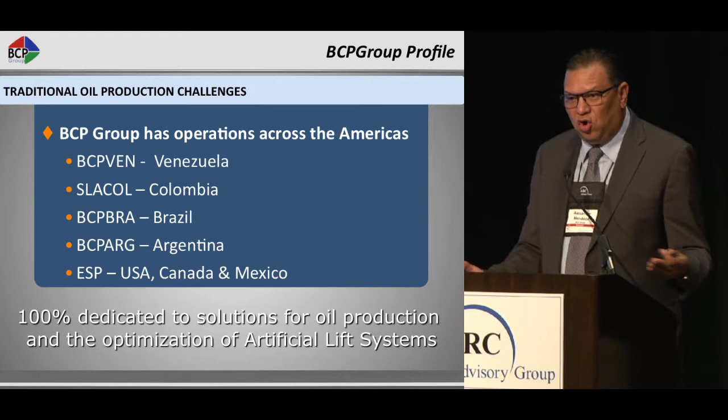But the challenge for the company today, for the end user company, is really to create more value and reduce the oil production cost with more efficiency. If you ask all the end users in the oil field, everybody needs to pay less money for the product, crude oil, and use less energy consumption.

But of course, all the oil production is not in the cities. If you identify the oil field globally, all the oil fields are outside the city. You need more people to go to the oil field, more dedicated people with experience, with technology, outside the biggest cities. In the Gulf of Mexico, in the Orinoco Belt, in the pre-salt in Brazil, all the oil fields in Africa, Saudi Arabia, are outside the big cities.

And the first challenge is oil production optimization. How we can increase the well run life in the downhole, how we can increase the surface equipment run life, and additionally how we can optimize this solution.

The other point that Sandy from ExxonMobil talked about is standardization, how we can create value in the future with the knowledge that we have now.

The massification for artificial lift technology is basically mandatory today. All the pressure in the downhole reservoir for the crude oil measured, in 90% of the oil fields, needs an artificial lift method: gas lift, rod pump, ESP, and PCP pump.

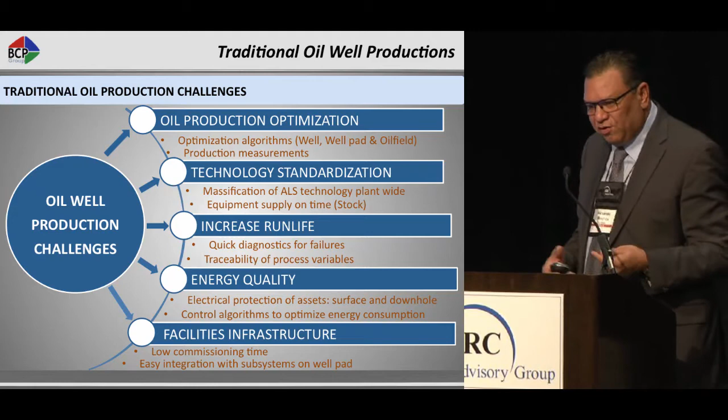For illustrative purpose, we show our challenge for every day in the oil field. For ESP completion and PCP completion, these two artificial lift methods are the leaders now in the global marketplace. Of course, there is the biggest base installed for rod pump, but in all the major new projects, these are the two methods we have as the sample for this presentation.

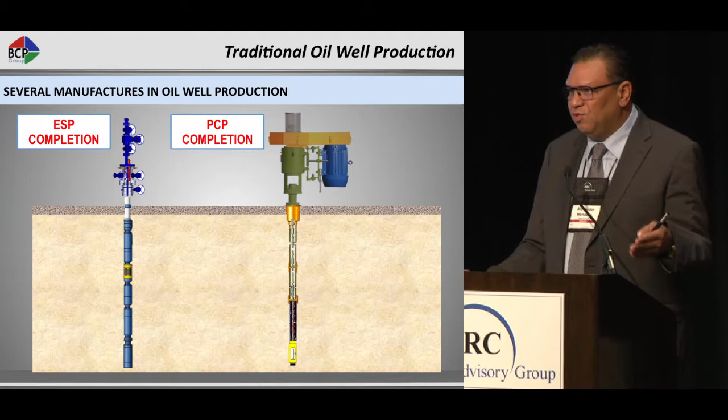When we have the ESP completion, it's impressive the quantity of permanent magnet motors working in this moment in the oil field. The market moved from induction downhole motor to the PMM motor, and this is complicated because it's two different kinds of control. How can we create the surface control system adaptive for these two kinds of motor today?

Several downhole pump manufacturers from US, from Europe, from Russia, and inclusive Saudi, there are different downhole pump manufacturers. How can we create a mathematical model, machine learning concept, and digital oil field concept to adapt this electrical control and consumption for these different kinds of manufacturing for downhole?

And of course, everybody has to know the information in the downhole. In the same case, we have different downhole sensor manufacturers. When we check this only for ESP, we have different pump manufacturers, different kinds of motor, different kinds of sensor, and different kinds of tip, and different kinds of casing, tubing, wherever.

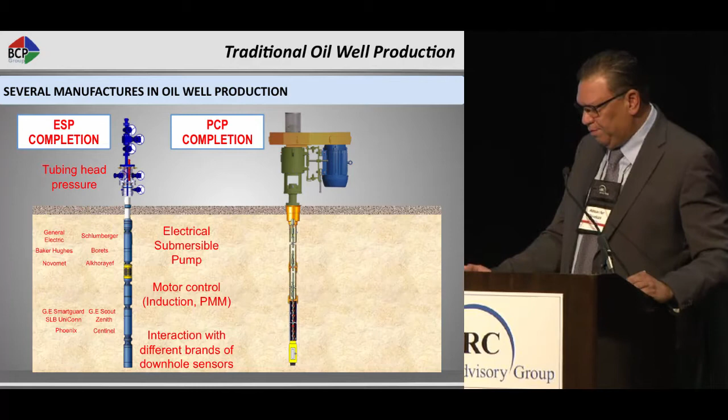And on the surface, we have tubing head pressure and tubing head temperature. And we move to PCP, the same case, different kinds of downhole manufacturing, other kinds of control, different kinds of control, because the torque is important in this method. There is backspin control for the rod string energy and other different features.

In only two methods, the more common methods that create value in this moment in the market, we have different manufacturing, different variables, different kinds of control, and this is the issue here.

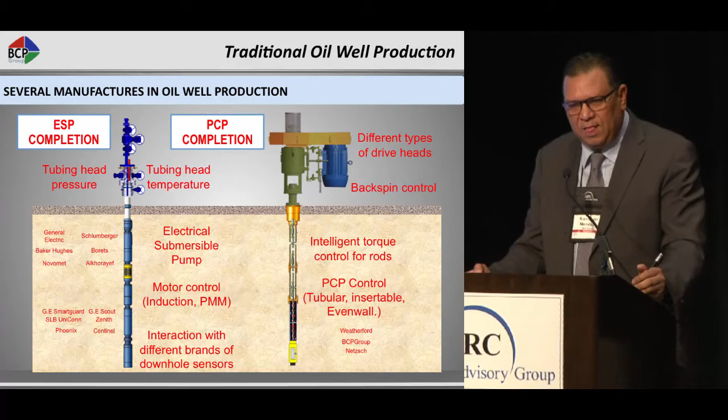If we check all the majors or the biggest end users in the oil field, the end user production companies move to the cluster arrangement. During the last 15 or 20 years, directional drilling moved the market to the cluster concept. I have a specific place on the surface, and through the drilling, we can achieve different kinds of oil and different kinds of sand.

And this is typical, basically, what we find now in the cluster, for example in the offshore. It's the same for the onshore or offshore, okay?

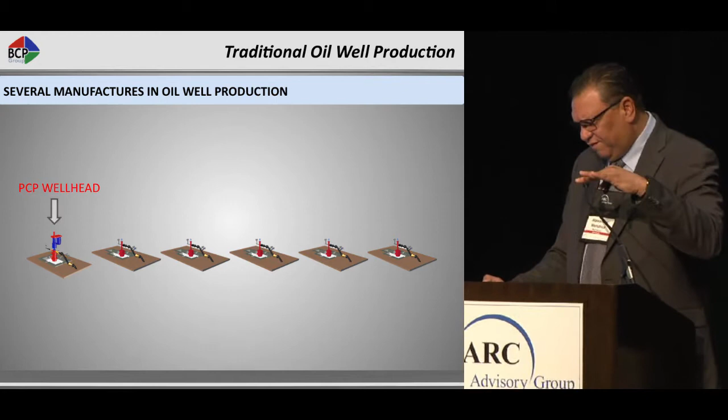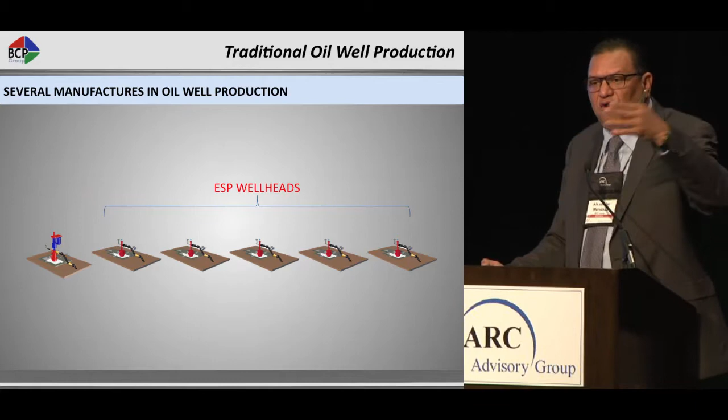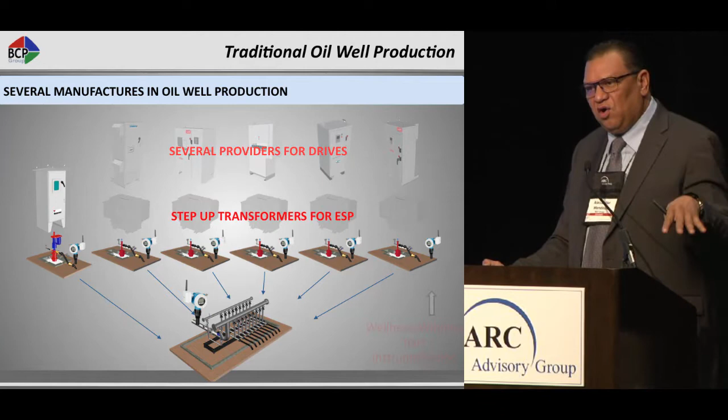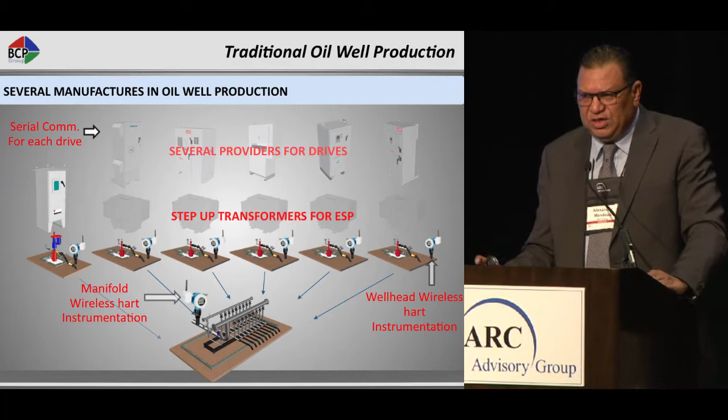One important issue for the integration of electrical and control, we need to identify that there are not only two disciplines combined in this case, not only electrical engineering or automation engineering. We have to involve artificial lift engineering, because in the end of the day, the barrel of crude oil is the more important target for all these companies.

How can we create civil engineering, how can we create a repetitive solution for the surface? Petroleum engineering, artificial lift completion—today I prefer this pump, but tomorrow I prefer another pump manufacturer, or we need to change the artificial lift method. Automation and control engineering.

And the more important issue in the end of the day is oil production management. How can we create artificial intelligence for the artificial lift? How can we manage oil production through energy management for the motor downhole or on the surface? Because the more important point in this case is all the variables that you have to control after completion of the oil well is the speed.

You don't have any other opportunity to control other variables after you have the completion of the well. And this is the integration.

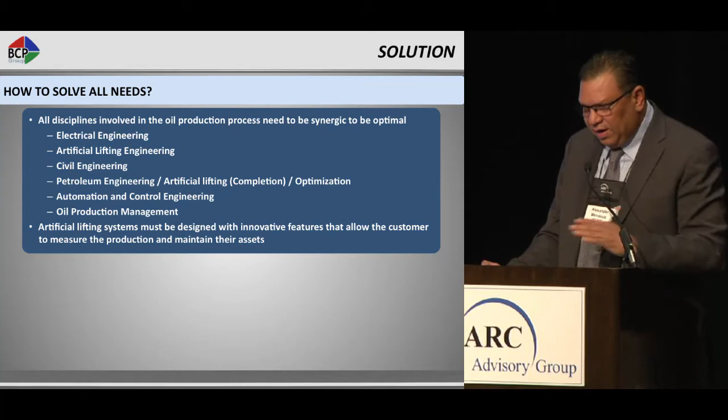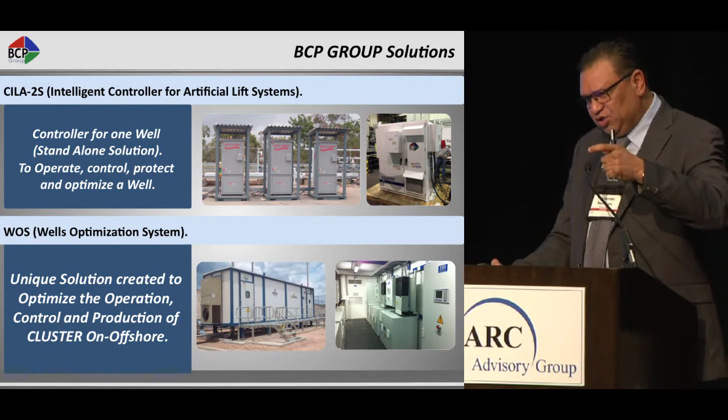The application is very important now for the behavior of the reservoir, because the electrical for VSD is a standard, managed during several years. But the more important issue now is how we can develop the application software control to integrate the electrical equipment and control equipment with the downhole equipment for oil production in the upstream.

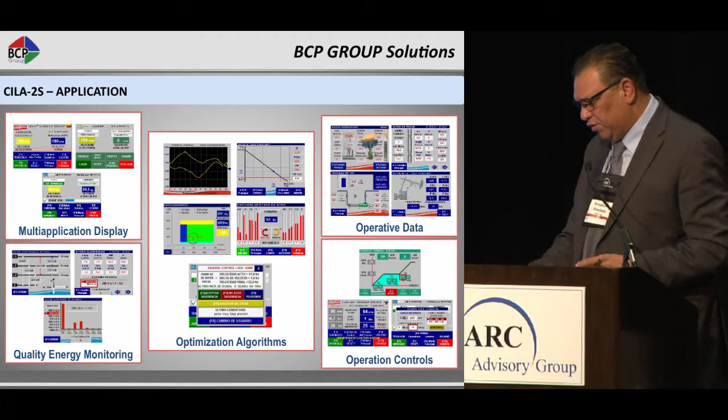Multiple application displays.

It's very important to integrate the operator for the end user. Quality energy monitoring, harmonic, efficiency.

Operative data for different methods, and for multi-phase pump solution too, because you have to integrate the downhole multi-phase production with the surface multi-phase pump production. And the operation control to control with efficiency all the downhole and surface equipment. But all this data is integrated in this platform.

Optimization algorithm, how we can optimize the rod pump, the ESP, the PCP pump, basically all oriented to the IPR, is the production, key production for the well.

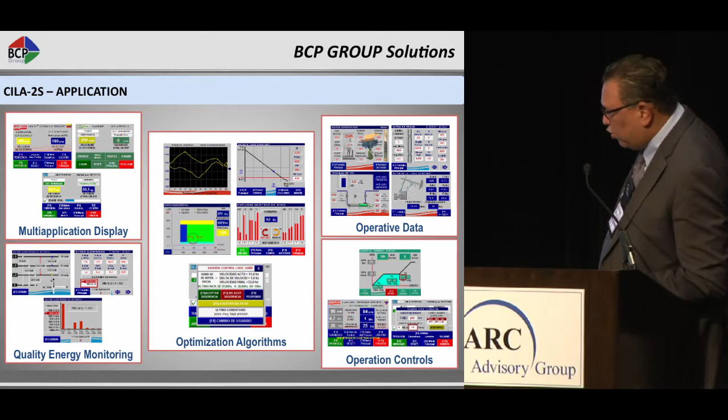This is the power the well has to oil production quantity, okay? In this case, the other important issue is the graph energy consumption integration with oil production with barrel per day.

The nomographic chart for PCP, ESP, and multi-phase pump, the digital circular chart for ESP basically, the dynagraph downhole and surface for rod pump, and all integrated for all artificial lift system well productivity chart.

Then this is the quantity of barrel per day we can produce in this moment for this oil field, for this oil well, or for this cluster.

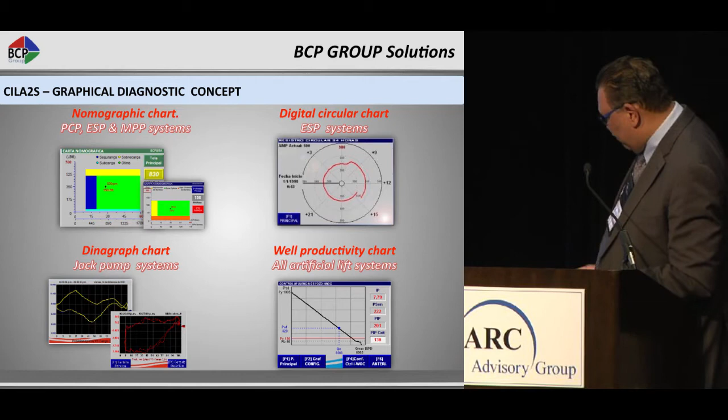Then we evaluate all the integration and we create this new concept. It's the well optimization system. We don't talk about the electrical equipment with drive, switch gear, switchboard, or DOL starter, or soft starter.

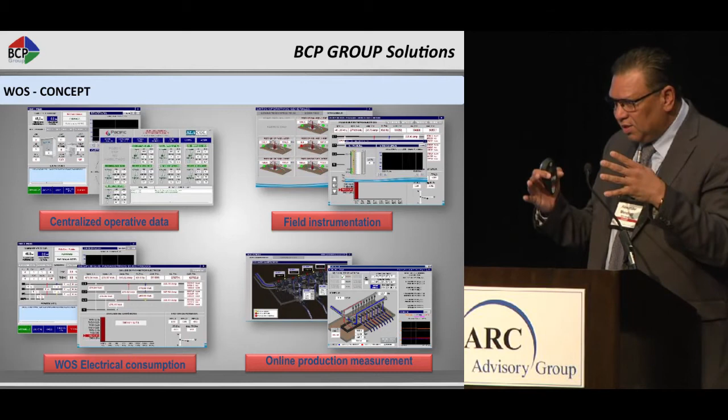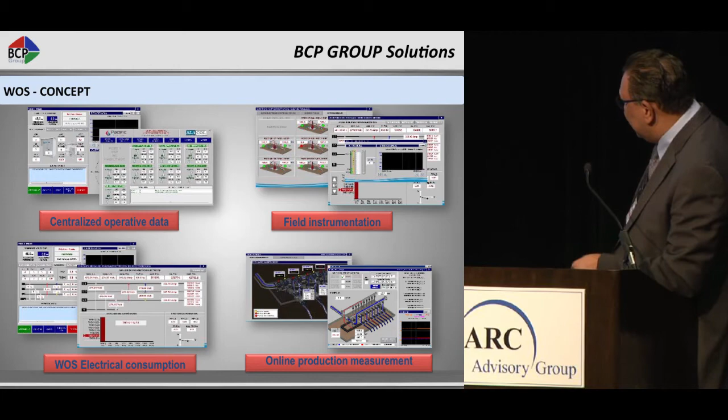We create the concept, management, the energy, and the control for the equipment. And in this case, we have central operation data, field instrumentation, online production measurement, electrical consumption, to take this new concept, intelligent well optimization and control, that you create with all the variables, the oil production in the reservoir, and how we can create more value with less energy consumption for oil production.

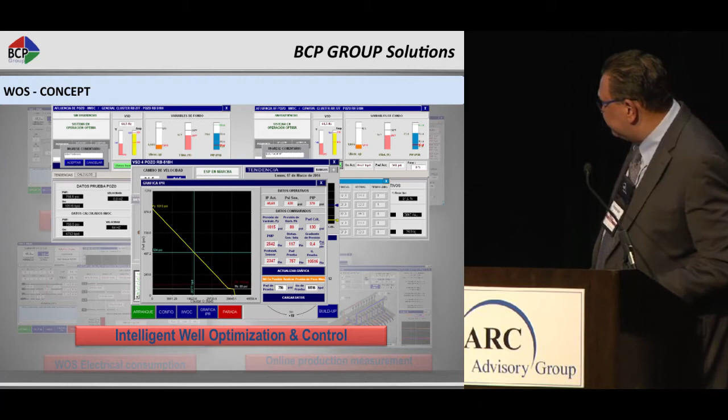How is the process, electrical and automation, and the supply chain?

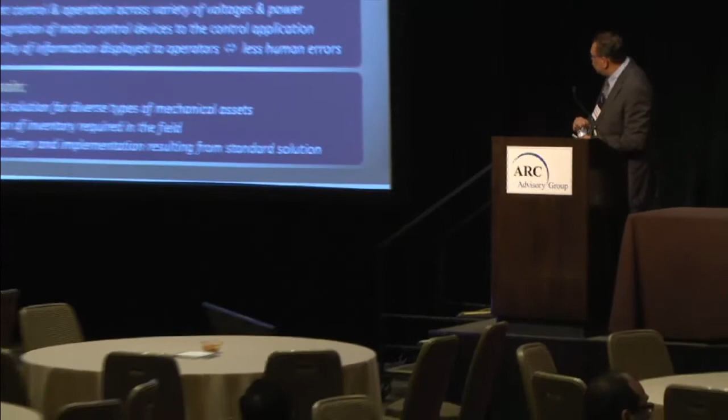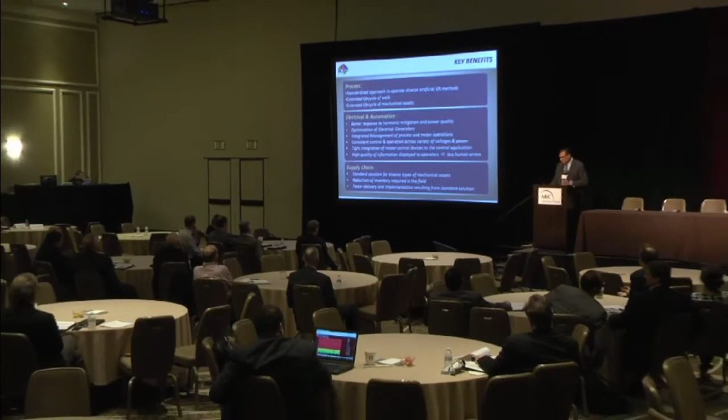First, how we can standardize approach to operate diverse artificial lift methods. Extend the life cycle of wells, basically in the downhole. Extend the life cycle of mechanical assets.

Electrical and automation, better respond to harmonic mitigation and power quality. Optimization of electrical generator or electrical network. Integrate management of process and motor operation.

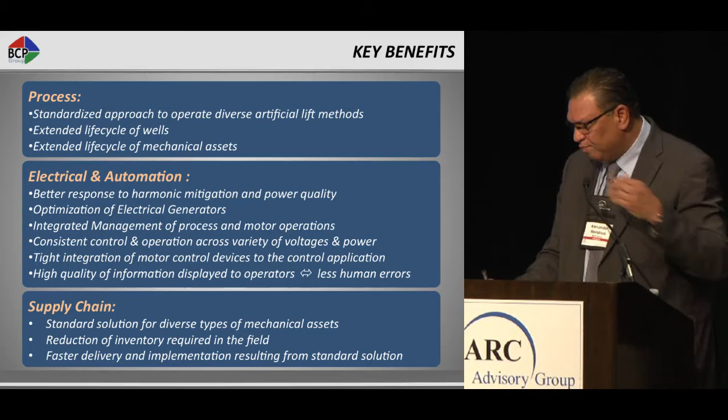Consistent control operation across variety of voltages and power. Tight integration of motor control device and high quality of information to the operation.

And what is the supply chain? A standard solution for diverse types of mechanical assets, reduction of inventory, and faster delivery implementation.

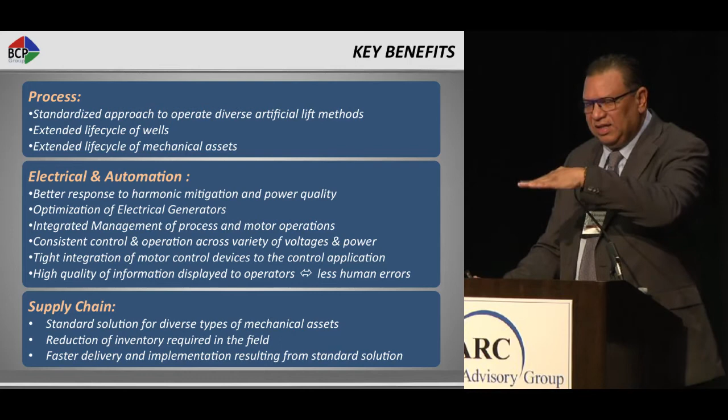We have only one control system and one management system for different artificial lift methods, for different downhole pump manufacturing, for different downhole sensor manufacturing. This is the more important issue here. We have only one control system managing the different kinds of artificial lift methods and multi-phase pump on the surface.

Lesson learned, technical and business. The market demands what capabilities in power electronics, artificial lift, control strategy, automation solution, with only one single interface operative.

Single integration is the key. It's important that all the integration is ready to use on field.

In this case, with Rockwell Automation, we dedicated engineering during 15 years to create value between the standard products. This is the other important issue in this case.

We are integrating more Rockwell Automation value equipment in our process for integration. Basically, in the PlantPAx.

Business. A single solution integrates all the component and equipment. We can create value for the business for line production for the equipment with a standard solution.

Expertise and synergy across the discipline. We involve automation, electrical engineering, petroleum engineering, reservoir engineering, so everybody puts the solution in one package. Expertise and synergy across discipline for effective solution, oil and gas.